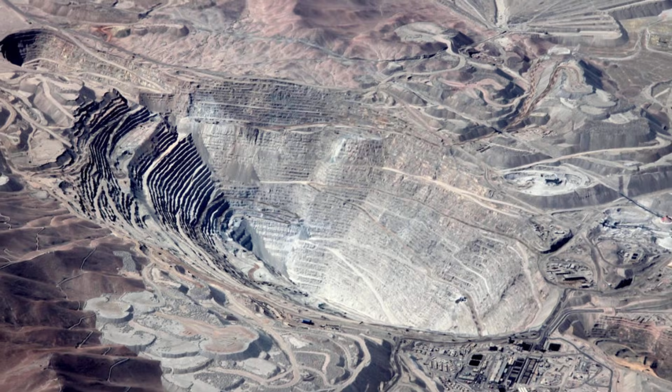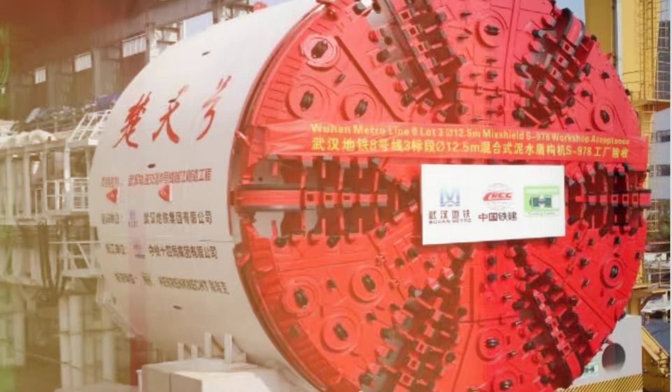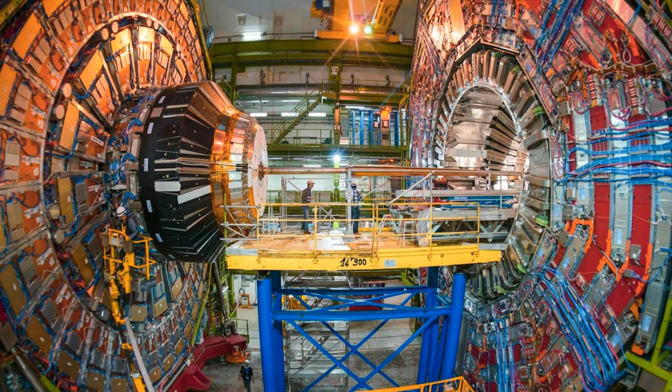Beneath the ground, across oceans, and through cities, the world's biggest machines don't just break records, they invent them. These are the giants that move 12,000 tons in one breath, dig deeper than any human, and cost more than skyscrapers. Each was built for a single reason: to do what ordinary machines can't, no matter the price. But what drove us to engineer such colossal, costly power, and which machine truly pushed human ambition furthest?

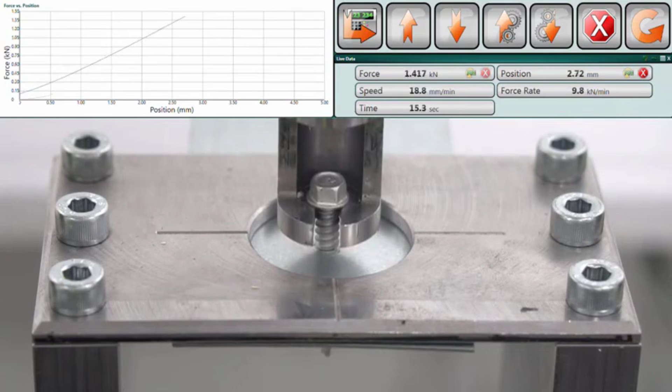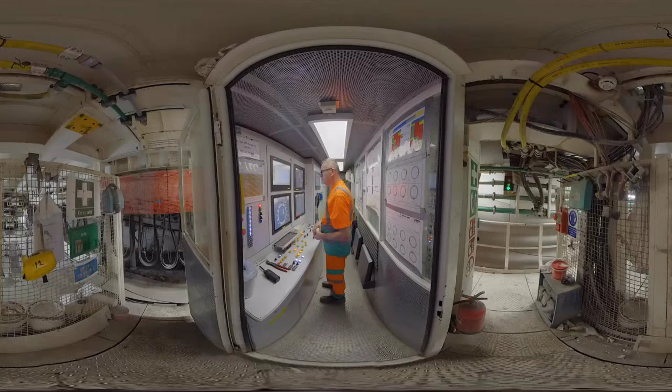Every mega machine starts with a challenge. How do you move, lift, or cut something so massive that old tools simply snap or stall? The answer begins long before the first bolt is tightened. It is the story of hydraulics, where pressurized fluid multiplies force until a single lever can tip mountains. It is the rise of digital control. Computers and sensors now track every load, every movement, and every fault, pushing these giants closer to their physical limits

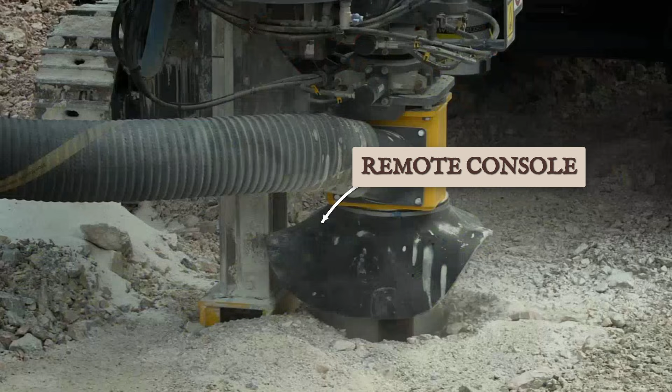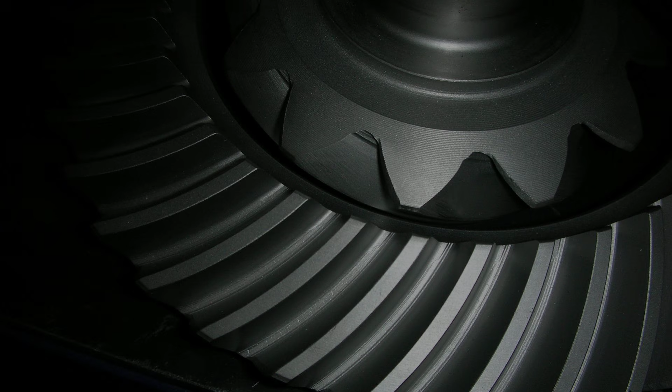while keeping operators safe. Underneath it all lies steel, but not just any steel. High-strength alloys engineered for fatigue and shock form the bones and muscles of these machines, letting them survive years of brutal, cyclic loads that would destroy ordinary metal.

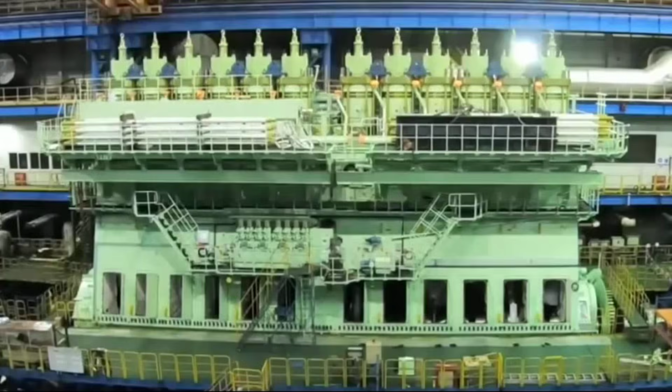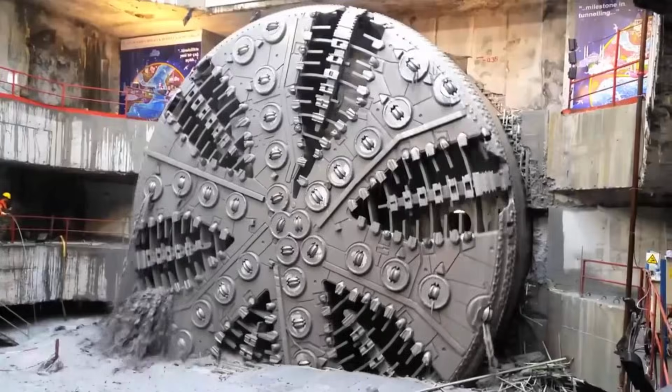As global demand for minerals, energy, and infrastructure exploded, engineers had to scale up everything: frames, engines, control systems, just to keep pace. The result is a lineage of machines that are not just bigger, they are smarter, stronger, and built to take on jobs that once seemed impossible. This is the foundation that makes the world's most powerful and expensive machines not just possible, but necessary.

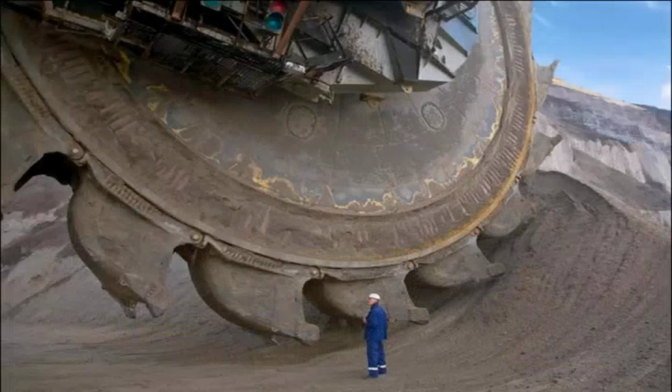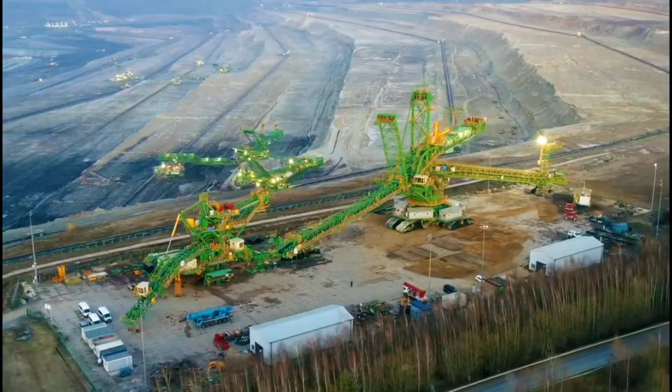Bagger 293 towers over the Hambach mine in Germany, a machine so vast that it stands 96 meters high and stretches 225 meters from end to end. Weighing roughly 14,200 metric tons, it is the heaviest land vehicle ever built. With just 5 crew members at the controls, Bagger 293 can strip away more than 8 million cubic feet of earth every day, its bucket wheels spinning relentlessly as conveyors carry the load away.

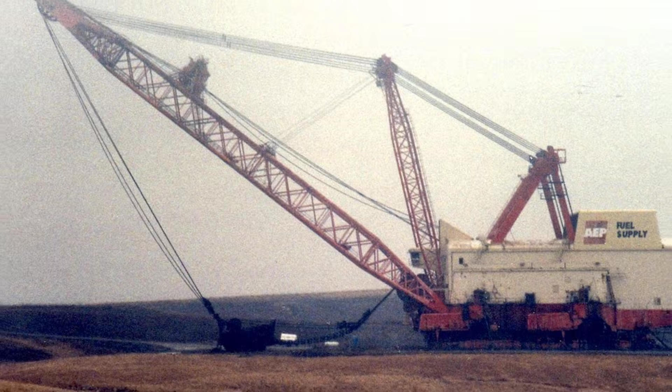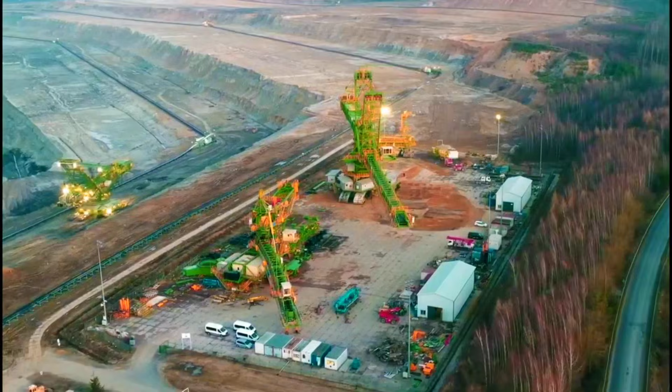Big Muskie once ruled the coal fields of Ohio, a walking dragline excavator that weighed over 13,000 tons. Its boom stretched nearly 150 meters, and its bucket could scoop 220 cubic yards in a single pass, enough to fill a swimming pool. For decades, Big Muskie's electric motors and steel cables moved millions of tons of overburden, rewriting what was possible in surface mining.

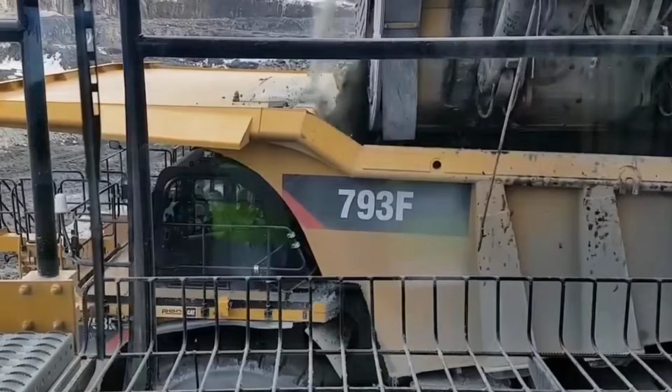Caterpillar's 6090 FS brings a different kind of power to the pit. This hydraulic mining shovel packs about 4,500 horsepower and swings a 52 cubic meter bucket, enough to lift nearly 100 tons of rock in one bite. Operators rely on high-pressure hydraulics and ultra-tough steel to keep the machine running day and night, matching pace with the world's largest haul trucks.

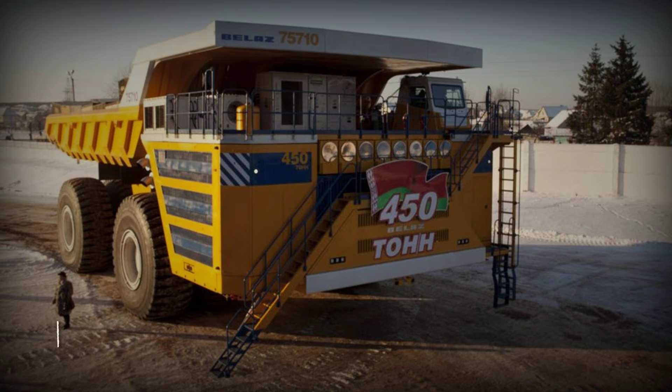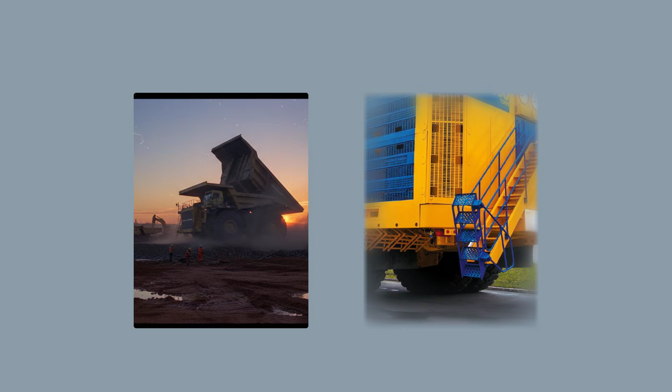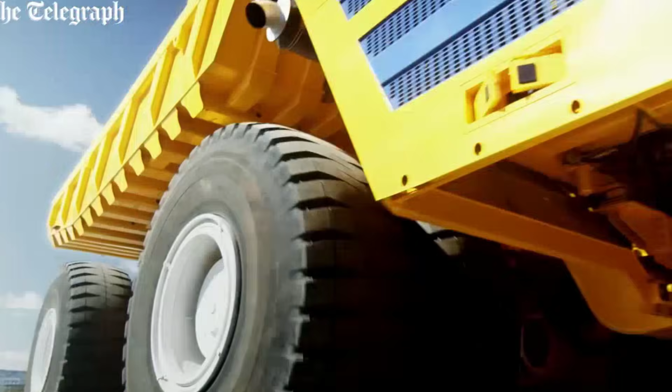BelAZ 75710, built in Belarus, is the king of mining trucks. Its rated payload is 450 metric tons, and fully loaded, it weighs over 800 tons, more than a loaded Airbus A380. Two 16-cylinder diesel engines feed power to electric drive motors, while tires taller than a person absorb the shocks of rough terrain. Each run turns weeks of manual labor into minutes, redefining what a single operator can accomplish with the right machine.

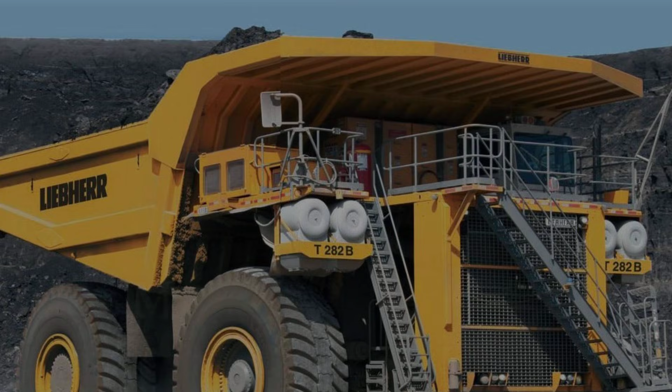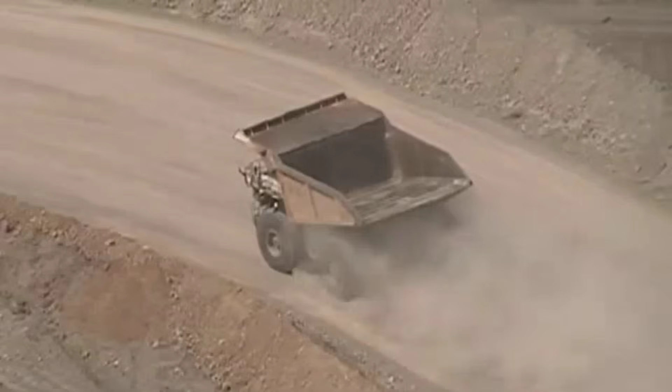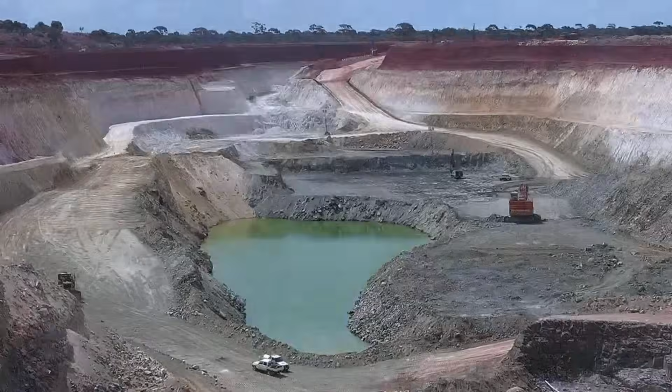Liebherr's T282 haul truck is engineered to carry payloads up to 363 metric tons, using a diesel-electric drive system that channels thousands of horsepower to each wheel. Its massive frame, built from ultra-high-strength steel, absorbs shock from uneven mine roads, while onboard computers balance traction and braking in real time. Every run shaves hours off material transport, turning what would be a convoy of smaller trucks into a single, relentless workhorse.

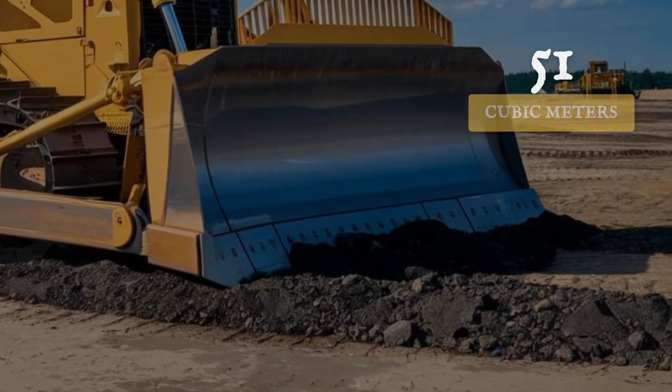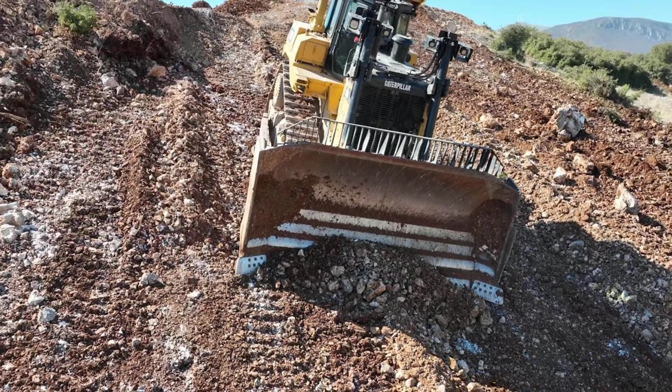Komatsu's D575A3 superdozer stands ready to reshape the landscape. With a blade capacity of 51 cubic meters, the largest ever put on a production dozer, it can push entire ridges of overburden in one pass. The dozer's reinforced undercarriage and high-traction tracks grip loose soil and fractured rock, letting operators cut new roads or flatten stockpiles that would stall lesser machines. Its 1,150 horsepower engine delivers the raw force needed to keep up with the world's biggest shovels and trucks.

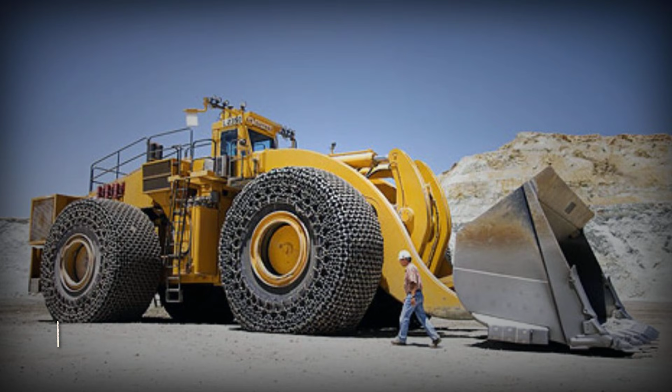The P&H L-2350 loader completes the trio, bridging the gap between haul trucks and shovels. This wheel loader can lift 72 tons in a single bucket, cycling load after load with hydraulic arms built to withstand years of brutal duty. Its articulated chassis and advanced steering let it maneuver in tight spaces, feeding trucks or clearing debris in record time.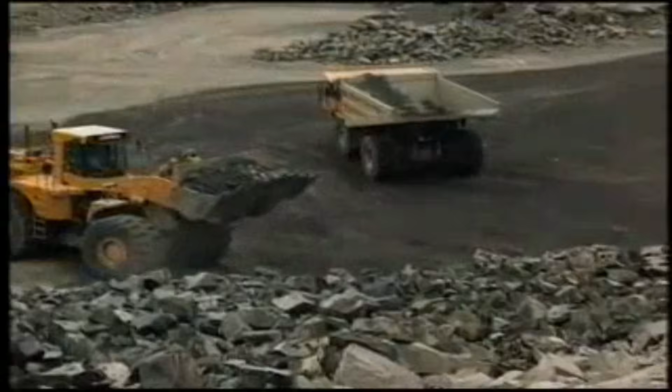Planners rely on the loader's cycle efficiency and reliability to keep the entire site moving, knowing that downtime here means millions lost. Together, these machines form the backbone of modern mining, where mobility, sheer power, and precision engineering drive productivity to new heights. Lifting 100 tons is routine.

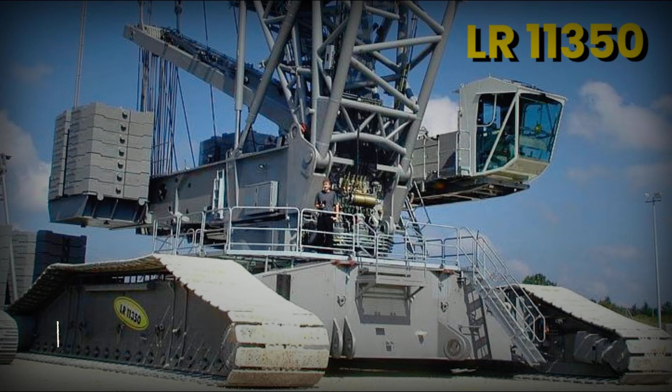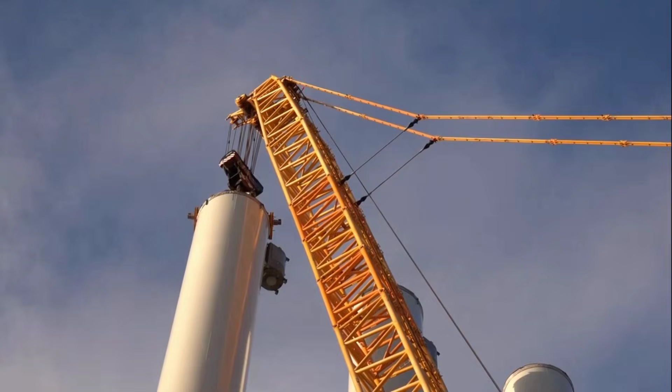Lifting 1,000, with no margin for error, is a different order of magnitude. The Liebherr LR 11350 crawler crane is built for these moments, 1,350 tons at its limit, with a hook height reaching 220 meters. Wind farms and industrial plants rely on its lattice boom, each lift calculated down to the decimal. Every variable, wind, ground pressure, and load path, scrutinized by planners who know a single misstep can cost millions.

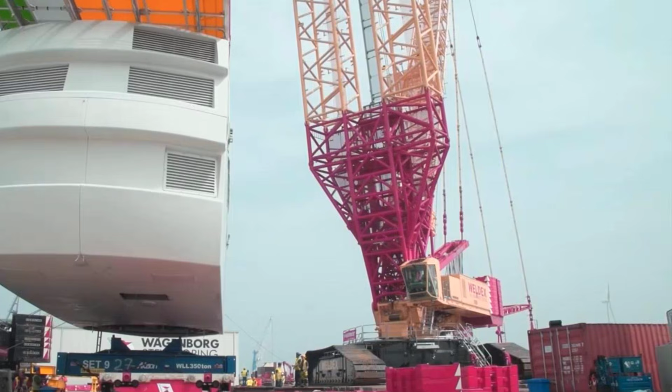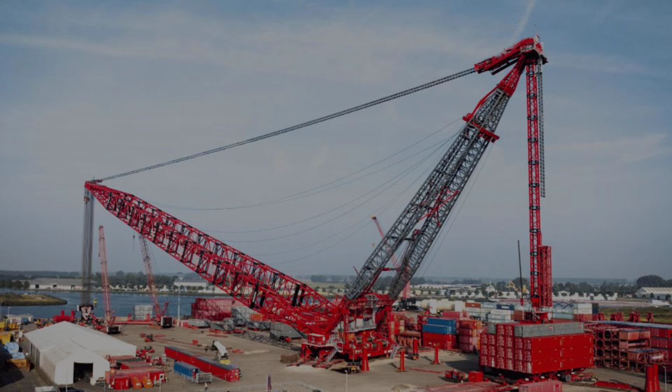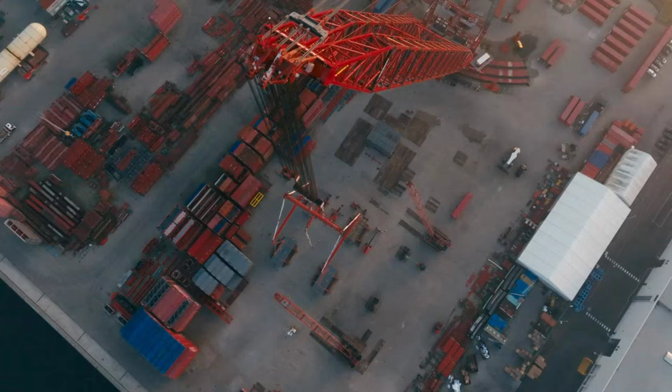When the job outgrows even the LR 11350, the Mammoet SK6000 ring crane steps in. Its modular ring track distributes the weight of refinery modules and offshore platforms, up to 6,000 tons in a single lift. Electric drives give operators the control to set down a load with millimeter precision. The SK6000 ships in pieces, assembles on site, and breaks down for the next mega project, a $100 million investment that pays for itself in months saved and risk reduced.

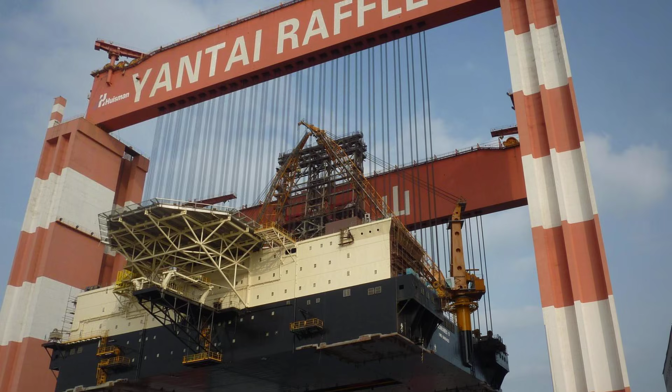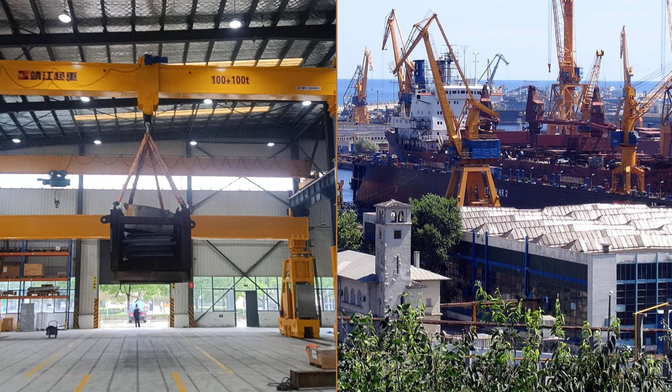Taisun, the world's strongest gantry crane, dominates a Chinese dry dock. With a record lift over 20,000 tons, Taisun lets shipyards hoist entire platform modules in one move. Fewer lifts mean less risk, less labor, and schedules compressed by weeks.

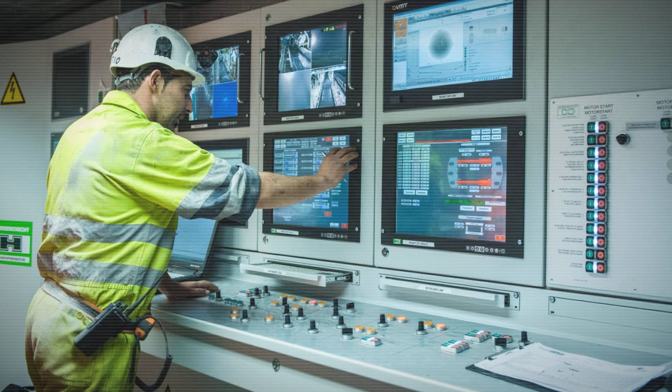Underground, the Herrenknecht S-Class tunnel boring machine advances up to 50 meters per day. Electric drives and hydraulics let engineers steer through shifting geology, while digital systems track every pressure and torque reading. These machines do not just move the impossible, they make mega projects modular, faster, and safer, pushing the limits of what can be built above and below ground.

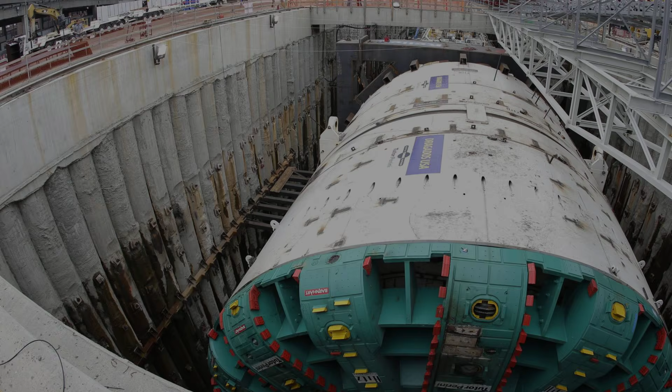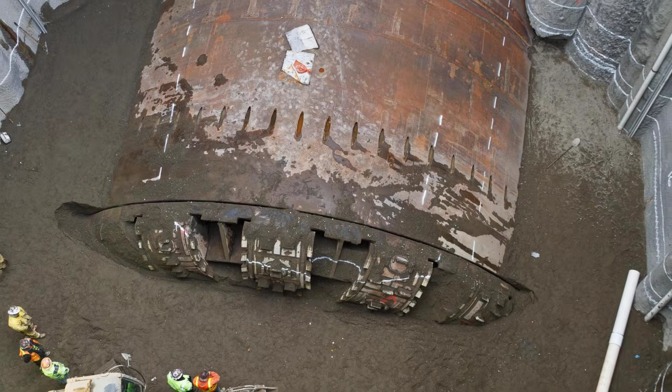Beneath city streets, tunnel boring machines like Bertha operate where a single mistake can threaten entire neighborhoods. Bertha's cutter head measured 17.5 meters across, wider than a city bus is long, and it packed 22 megawatts of electric power, enough to light thousands of homes. In Seattle, just 300 meters into its drive, Bertha struck a steel well casing hidden in the ground. The impact damaged the main bearing seal and ground its progress to a halt.

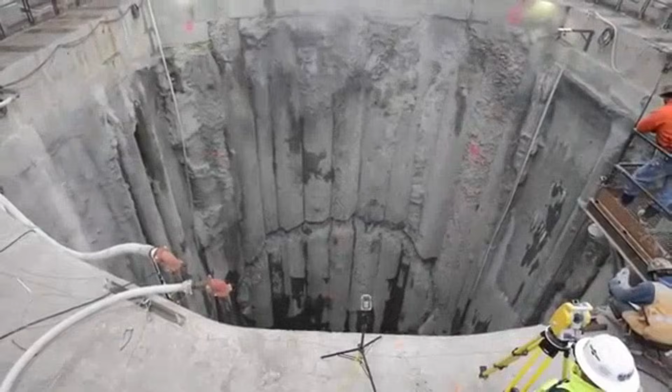Crews spent nearly 2 years and tens of millions of dollars digging a shaft 36 meters deep to reach and repair the machine. Every day lost meant mounting costs and public scrutiny, a reminder that even the most advanced machines are vulnerable underground.

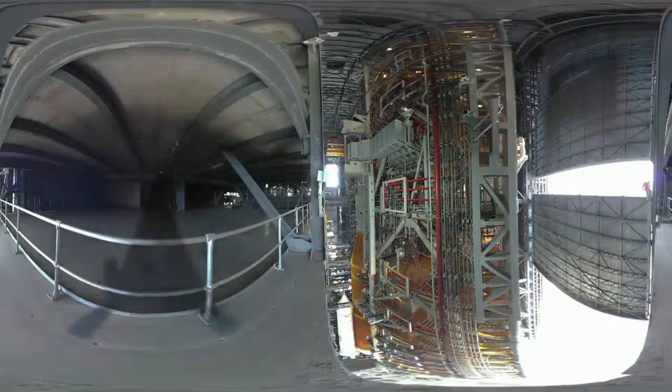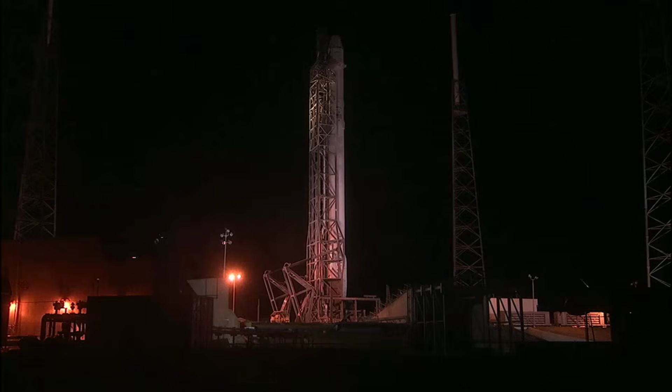On the surface, NASA's Crawler Transporter 2 moves at less than walking speed, but it carries the world's largest rockets to the launch pad. Weighing 2,721 tons and spanning 35 meters wide, Crawler Transporter 2's upgraded systems keep a fully stacked rocket level within a fraction of a degree. Each rollout is a high-stakes operation, where a single slip could jeopardize years of work and billions in hardware.

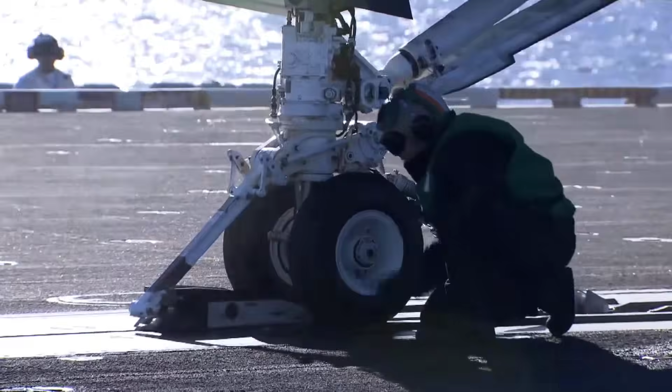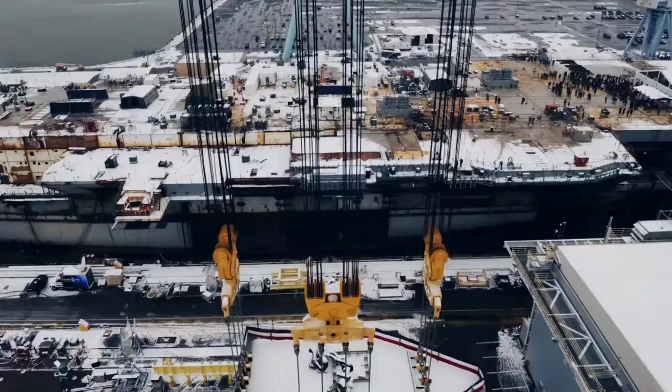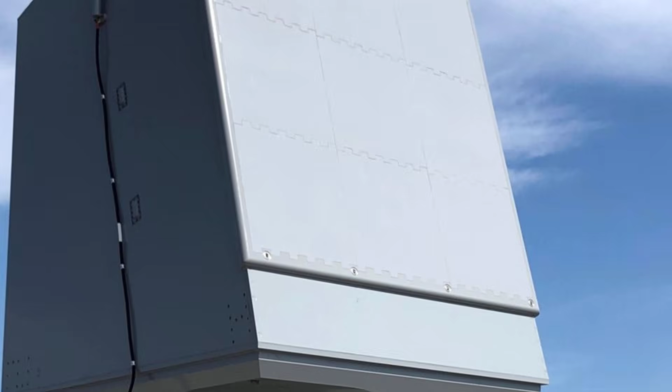A single ship, longer than 3 football fields and weighing 100,000 tons, can project air power across any ocean on Earth. This is the scale of the Nimitz and Ford-class nuclear aircraft carriers, floating fortresses powered by twin reactors that each generate hundreds of megawatts. Their construction costs soar past $10 billion, driven by nuclear propulsion, electromagnetic catapults, and the ability to launch more than 70 aircraft from a moving city at sea. Every system, from radar arrays to armored flight decks, is built for endurance and dominance, the result of decades of naval engineering.

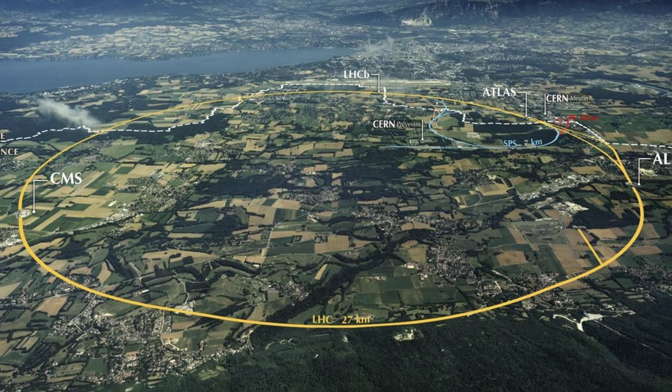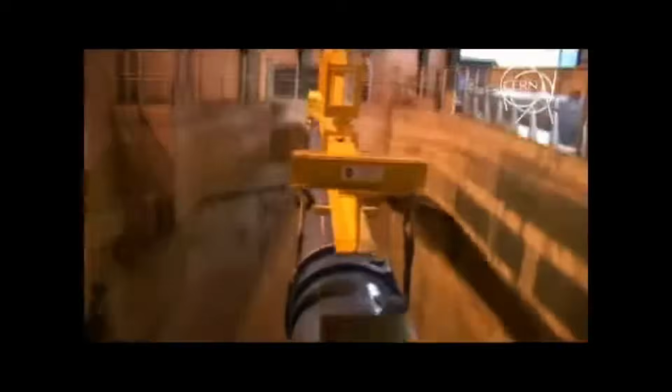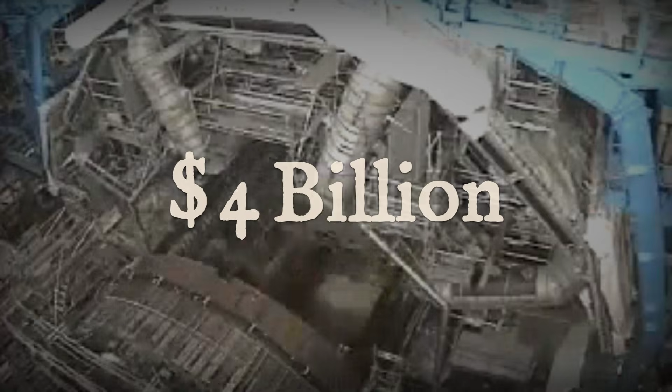Beneath the ground in Europe, another kind of giant stretches for 27 kilometers under the French-Swiss border. The CERN Large Hadron Collider is the most ambitious scientific machine ever built. Thousands of superconducting magnets, cooled to temperatures colder than deep space, guide particles to nearly the speed of light before smashing them together with energies reaching 13 trillion electron volts. The collider's price tag, more than $4 billion, reflects not just its size, but the precision required to unlock the secrets of the universe.

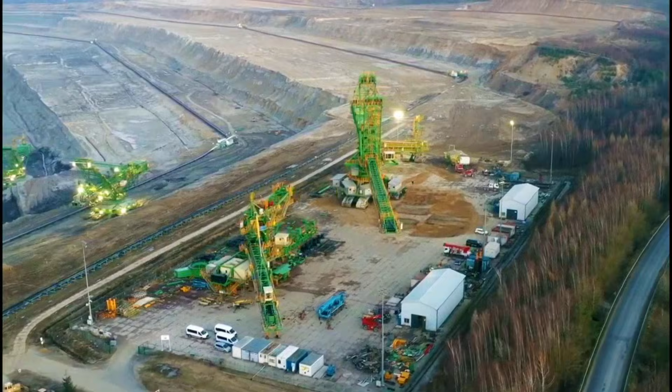Together, these machines stand as proof that when ambition meets engineering, limits are meant to be shattered. Right now, these machines are pushing the boundaries of what is possible, reshaping cities, fueling economies, and defining the scale of human ambition. Their cost and power reflect the stakes of every project we undertake today. Because ultimately, our world is only as bold as the machines we dare to build.